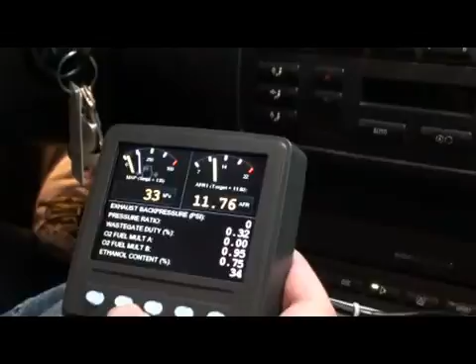Okay, we're going to demonstrate some of the features of the ProEFI on the BMW E46 M3. This is our color CAN display, which we don't have mounted in the car yet, but it visually will show you some of the things that we can do. We've incorporated some of the CAN bus on the car. We've got all 4 wheel speeds coming in through the factory CAN bus, and then we can also change our boost control settings with the cruise control when the cruise control is not active.

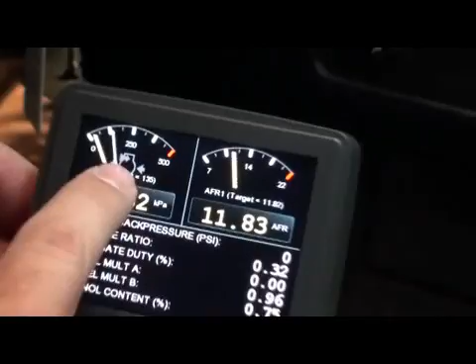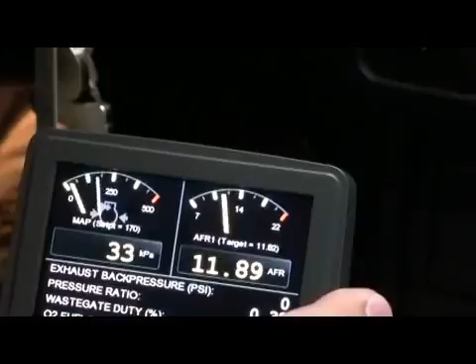So as you can see, if you watch the graph here, this tells you our boost control is set to 135 kPa, which is our little white needle. The yellow needle is our active manifold pressure. And if we click it up 1 notch, it goes to 150 kPa. Click it up again, it goes to 170. Click it up again, it goes to 185. Okay, so we can drop that back down to our base setting.

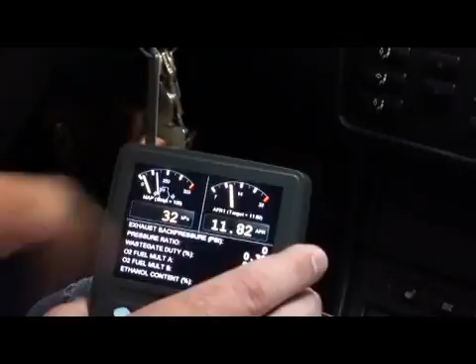And then also we've incorporated the set button to work as a scramble boost. So if you watch the target here, when I hit this button, it jumps it up 20 kPa, and we've got it set to run for 3 seconds, and then it drops it back down to 135. So as you're driving, if you want just a little bit more boost, just hit that button. You don't have to click it up onto a different setting.

Now, each one of the boost control settings, it's not just one setting, it's a curve based on how fast the car is moving. So that's important because obviously these cars are traction limited with the power potential of this engine. So at the lower speeds, you can have a curve that's ramping from whatever your set point is, and as the car is moving faster based off the non-driven wheels, it ramps the boost in accordingly. So you can maximize the power potential that you can put to the ground through every setting and every gear.

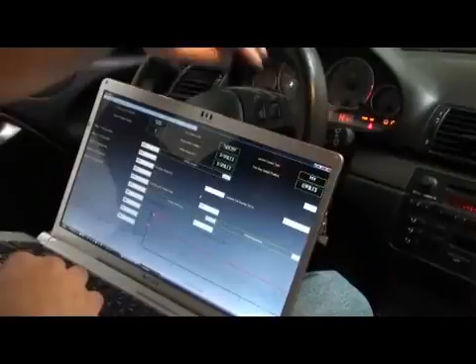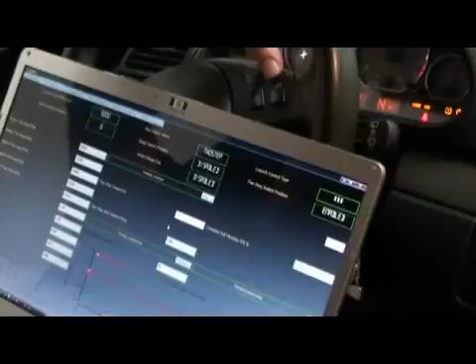The other function of the boost control through the steering wheel is you can change your 2-step settings along with your boost curves that coincide with one another. So as you can see here on the user software, this tells us what rev limiter is active. We have the 2-step active right now, and what our current limit setting is. So as I click the increase on the cruise control button, it goes to 5200, which is our stage 2, 5400, which is our stage 3, 5600 stage 4, and 5800 stage 5.

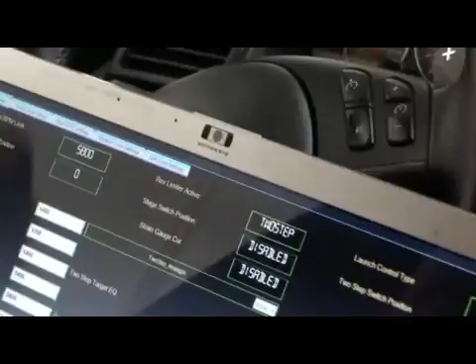Now the target boost is going to change with each one of these as well: 150, 180, 200, 225, and 250, as you saw in the previous video. Okay. And also, when you're making your adjustments to your boost setting, you'll see that it can trigger into the high octane mode. So we go up, there's your high octane, we go back down and it kicks it back into the low octane mode.

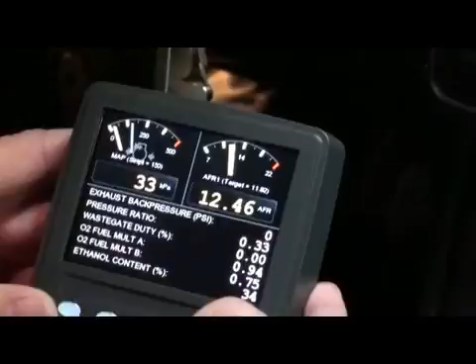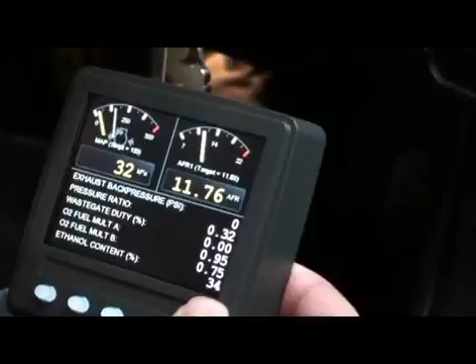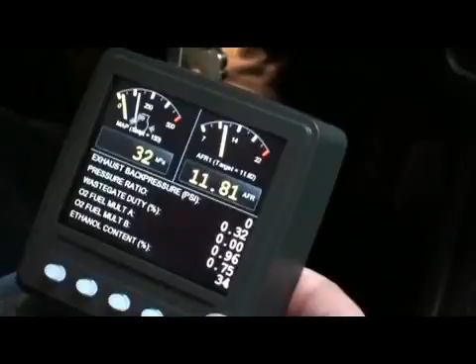Now this particular car is running on a flex fuel sensor, so it has ethanol running through it right now, about a 30% mix. Let's look and see what it tells us here. Our ethanol content's 34% right now. So I can drive this car to any filling station, put regular pump gas in it, and the computer will automatically adjust the boost, the timing, everything it needs to run whatever mixture from 0 to 100% ethanol, 100% gas to 0% ethanol. So that's all handled, and you can monitor how much you have right there, so you can decide which boost curve you want to run. If you choose not to, the ethanol feedback will turn the boost down for you.

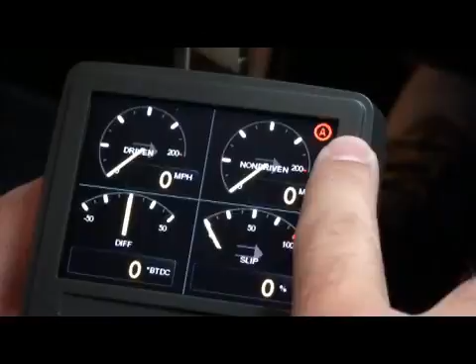Okay, now on every screen, you're also going to see this little A come up here. That's a check engine light. That's going to come on whenever you've got something programmed to tell you there's a problem with the vehicle. That's aside from the factory computer. That's through the ProEFI. Okay, so I'm going to start it up, see it goes away.

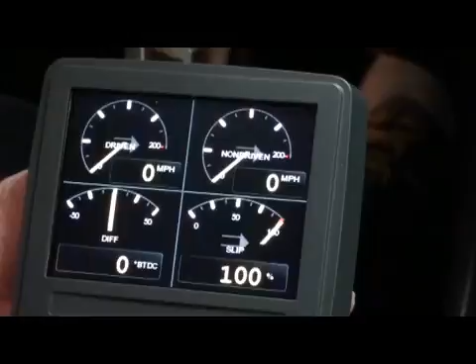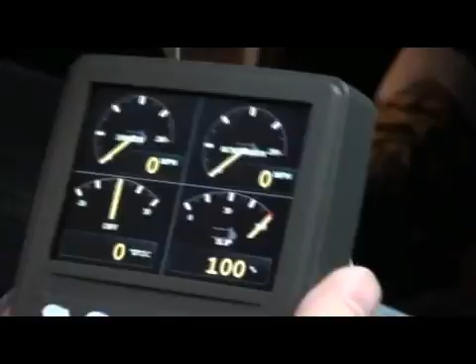Now, this is showing you the driven wheel speed and the slip percent and your differential between the two. So as we put the car in gear, we're on the dyno right now, so it's going to fault the non-driven wheels because we're on a 2-wheel drive dyno. Alright, so as you see, as we start driving away, that's your slip percent right there. 100% slip, or 0% slip, went from 100 at idle when the clutch was in. Driven wheels are going 9 miles an hour, 10 miles an hour, the fronts are faulted.

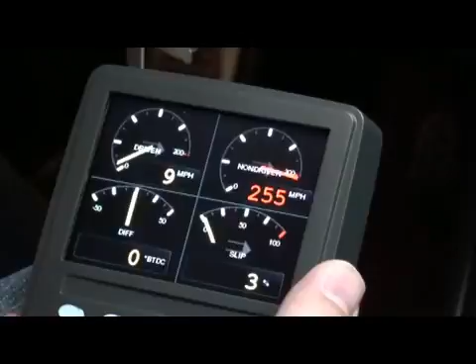See the little flip in the slip there as we change gears. That's a non-driven wheel versus driven wheel. That's how our traction control works. You can control the slip rate from launch, so you can allow it enough slip to get you out of the hole quick, and then clamp down on how much slip you'll allow as you're moving once you've got the power and the car's in the power band.

Okay, another thing that you're going to notice with the ProEFI kit for the E46 BMW is that you won't get a check engine light. You see the service light's working. Start it, it goes away. We've done some things to keep the factory computer happy, so you won't get that check engine light. As long as your tune is good, the factory computer will remain happy.

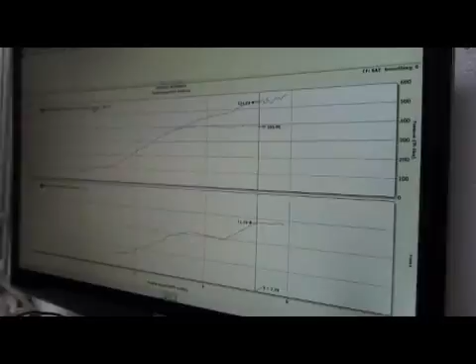Here's a dyno graph of the run we just made. A couple things to point out on this car. It has a stock exhaust, stock fuel pump. We've upgraded the injectors to 1100cc injectors. However, on ethanol, the stock pump can't keep up very well. Fuel requirements are a lot higher. As you can see here, it started to go lean on the top as fuel pressure was dropping.

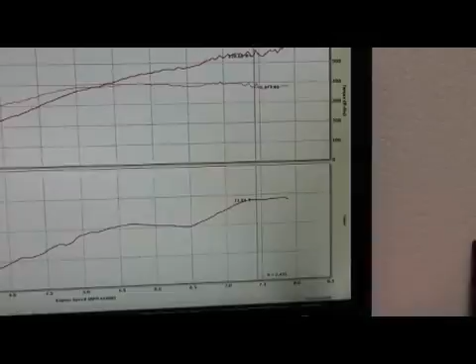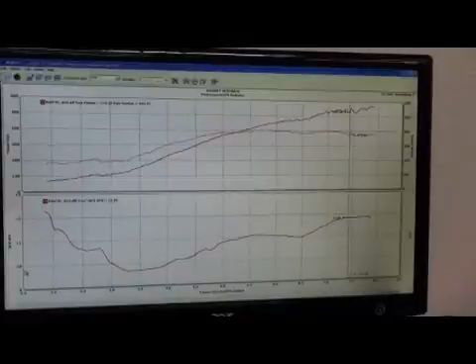The injectors went all in. The computer was compensating the whole time, but we just completely ran out of pump up there. Fuel pressure was all the way down to 25 pounds. So you can see it started to get unhappy with the mixture that it was seeing, and then we have no smoothing and standard correction on this. This is about 9 pounds of boost. So it's not too bad for a pretty much completely stock car with just a turbo and a computer on it with injectors and flex fuel.

Here's a data log of the run we just made. You can see here where the fuel pressure was dropping off, injector duty cycle was climbing. Once fuel pressure started dropping, our injector duty cycle was 49%, and then right here it hit 100%. Computer's compensating the whole time.

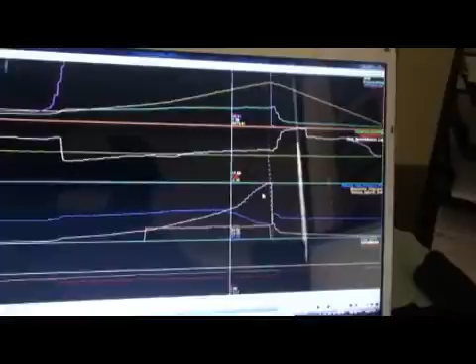Now normally we would have a fault triggered as soon as this variance got to be about 10%, and it would shut the boost down, and you could have it turn on a rev limiter, multiple fault conditions you could have the computer set up to do. You can see here the boost was flat. This is strictly injector duty offset based on the loss of fuel pressure. So it maintains that air fuel mixture as much as it can up until the point where the pump and injectors just can't overcome it.